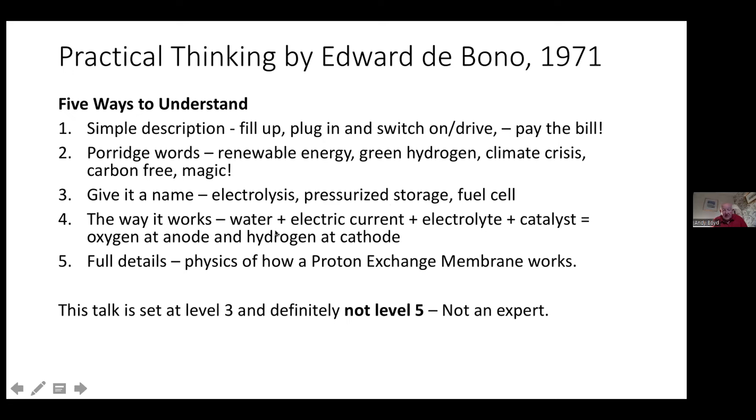Then onto even more complicated is the way it works. And finally, to full details, all the physics of how things work. Well, this talk is set at level 3-ish, and definitely not level 5. So it's not an expert view. So when you see these words, electrolysis and pressurized storage and stuff, don't really ask me the full details of how proton-exchange membranes work, because I don't know.

Just a little bit about sustainability. Sustainable projects make things better today. If they don't make things better today, then why would you do them? And you have to do it efficiently, and you have to bank for the future. So doing something today that makes things better in the future is the banking for the future. And the final one, the fourth, is with fairness, because without fairness in the system, people eventually withdraw their support and projects become unsustainable, or governments become unsustainable.

So just moving on a bit, here we are now. The hydrogen industry is going crazy. There's so much going on. Every day there's a new announcement about something to do with hydrogen. The EU is committed to produce 10 million tons of renewable hydrogen by 2030. And that translates to about 80 billion euros. It's a huge, huge market, potentially.

Scottish Power's committed to producing something called a hydrogen hub in the Cromarty Firth, and there'll be more of these in Scotland. European gas network operators want to create a backbone pipeline network so that they can pump hydrogen all around Europe, as a forerunner to a trading mechanism. SSE have proposed to build a hydrogen production plant at Brora attached to an existing wind farm. And SGN and INEOS, that's Scottish Gas Networks, are going to trial a hydrogen pipeline in Grangemouth.

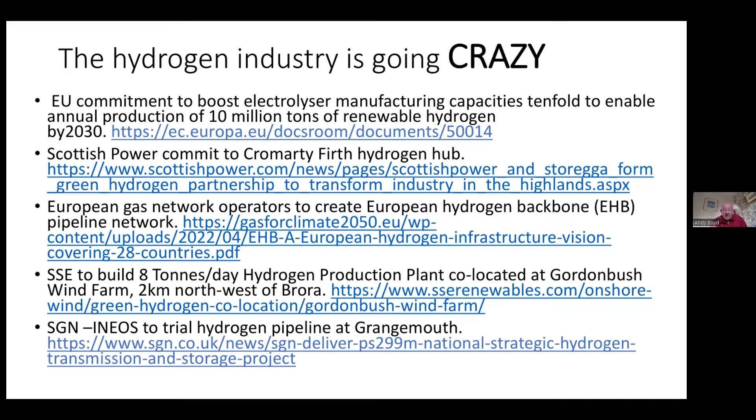So the contents of the presentation are: background, production - how do you make it, use - what would you use it for, how do you store it, how do you move it about, safety is a big issue, and then something about the politics and strategies for a hydrogen future.

So the background: hydrolysis was discovered at the time of the French Revolution, so it's been around for a long time. Hydrolysis coupled to renewable energy gives you green hydrogen. There is blue hydrogen and gray hydrogen. Blue hydrogen is made from hydrocarbons and coupled to carbon capture and storage, and gray hydrogen isn't - it's the other stuff. It's been much talked about as an industry for at least the past 30 years, including in Jane's book on with Malcolm Slesser, where she's got a whole section on potential for hydrogen.

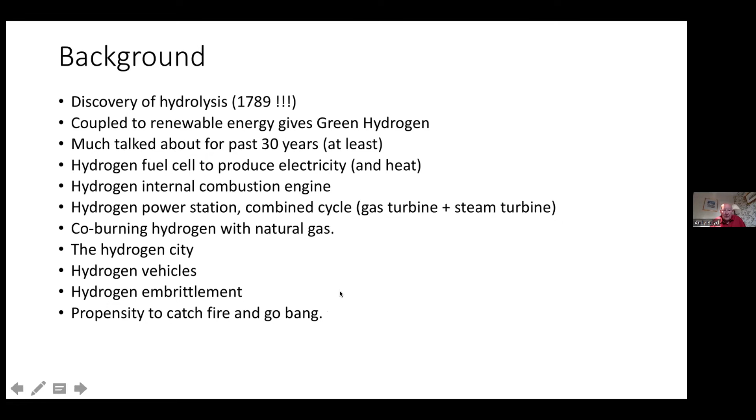And here's why. This is the hydrogen airship that caught fire in 1937. People will cite this as saying why you can't have hydrogen, because you're going to have disasters like this.

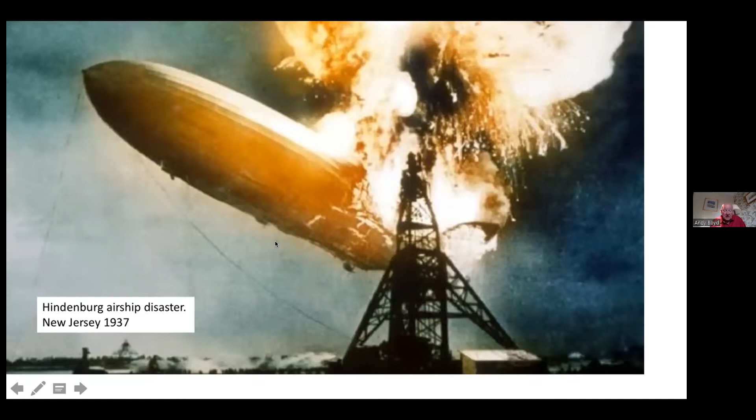More recently, there have been other disasters with hydrogen. At the Fukushima nuclear power station in Japan, there was a hydrogen explosion. Hydrogen was produced in the reactor by a malfunction, which blew the top off the reactor.

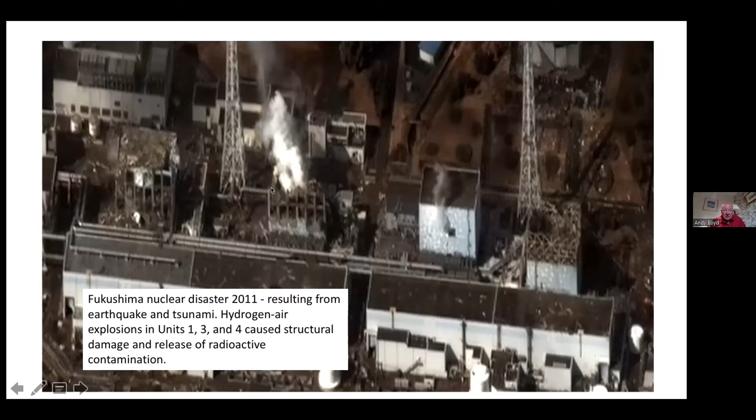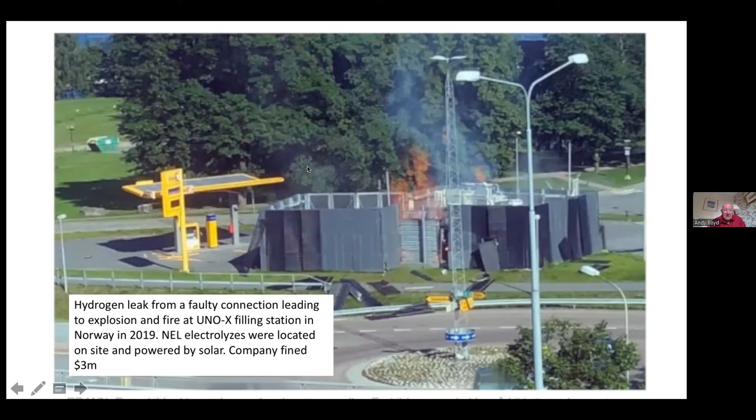So these connections between one bit of the system and another are quite susceptible to leaks, as you would expect if you had one piece of pipe joining another - it's the bit where they join where you're likely to get the problem. So there's been a lot of research and development on different types of joints. That's ongoing, but that's what happens if you don't deal with that.

So here's an interesting but quite a busy slide about the properties of hydrogen. It's the smallest atom, the lightest, it's highly diffusive, and as you saw above, it's highly flammable. At 1 bar and 25 degrees C, so that's ambient temperature, it doesn't weigh anything - it's light as anything, much, much lighter than air. If you have a cubic meter of hydrogen, you've only got a few grams of the stuff in there.

The mass energy content, though, is 120 megajoules per kilogram, which is higher than methane and higher than petrol per kilogram. But of course, if you've just got gas, you don't have very many kilograms, so this is what this volumetric energy content is. It's only got 11 megajoules per cubic meter, where methane has got 40. So because methane is denser and has got less energy content per kilogram, it works out that for the volume at ambient conditions, it's got 4 times the energy than hydrogen has.

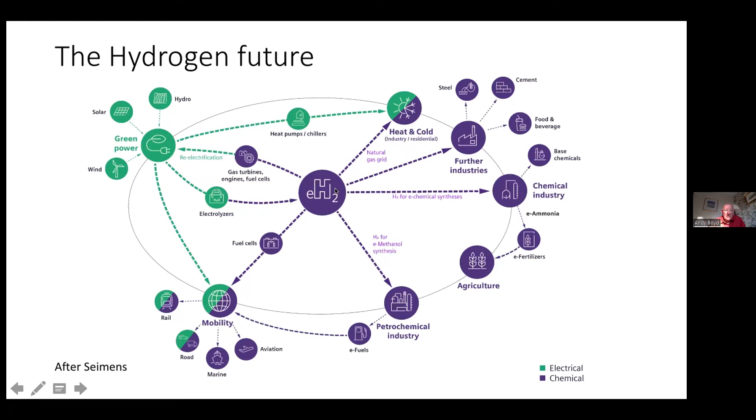So back to that hydrogen future. We've been through this before, and it's just stuck in again. And now we're going to be going on to how you make it through electrolyzers and what you do with it. So production and uses.

Water electrolysis, that is passing electric current through water, produces oxygen at the anode and hydrogen at the cathode, and this is what's called green hydrogen. They also produce it from methane pyrolysis. That's methane bubbled through molten metal, and it breaks down and produces hydrogen.

The most common way of producing it, though, is through steam reforming with methane at high temperature, and that produces grey hydrogen, which can become blue hydrogen if you've got carbon capture and storage. Oh, sorry, let me go back. And there are other methods.

So currently, the world production of hydrogen from all methods is about 90 million tons per year. So an EU proposal to produce 10 million tons a year is a significant part of the world production at present.

It's used mostly in the petrochemical industry for the desulfurization of hydrocarbons. And it's used to make ammonia, which is used to make fertiliser, and it's used for fats and oils, and even in margarine. It's used in the semiconductor industry as rocket propellant and all sorts of other special scientific-like uses. And it's used as an energy carrier in fuel cells and e-fuels.

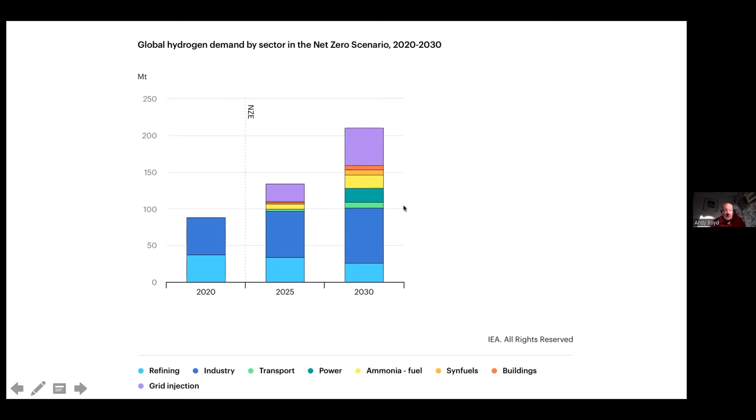So let's just go on to production. How do you make it? Well, there's alkaline electrolysis that's been known about for years, which is, well, you'll see a slide in a minute, but it's an electrolyte and a cathode and an anode. You pass electricity through it, you get oxygen at one and hydrogen at the other.

The proton exchange membrane method has taken over from these other methods. So there's no more... it's like the Sony system for making whatever it was that didn't become VHS—I can't remember what it's called. But following along is this stuff called solid oxide electrolysis, which might become the DVD of hydrogen production. It's got some good credentials. And then there's a whole host of other methods coming along, all in research and development, developing fast, but this proton exchange membrane method seems to have got the jump on everything else.

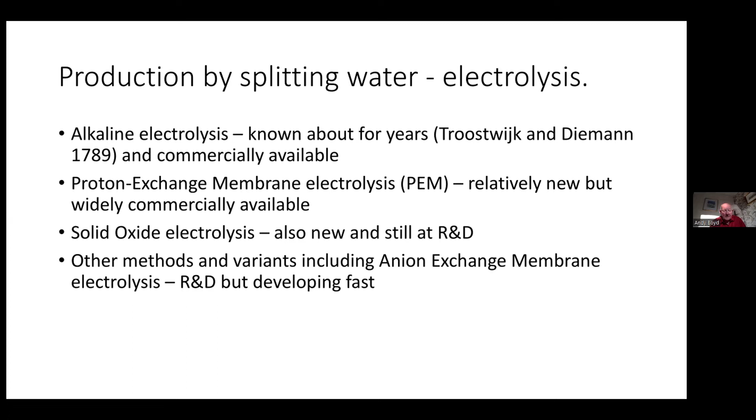So, alkaline electrolysis. This is the liquid method, using usually potassium or sodium hydroxide as your electrolyte. You have a cathode and an anode, and some sort of separator so the bubbles don't mix. You introduce water, and what you get out at this side is hydrogen, and what you get out at this side is oxygen. That's a liquid, low temperature process, and that was the preferred approach for years and years, until they came up with the proton exchange membrane method.

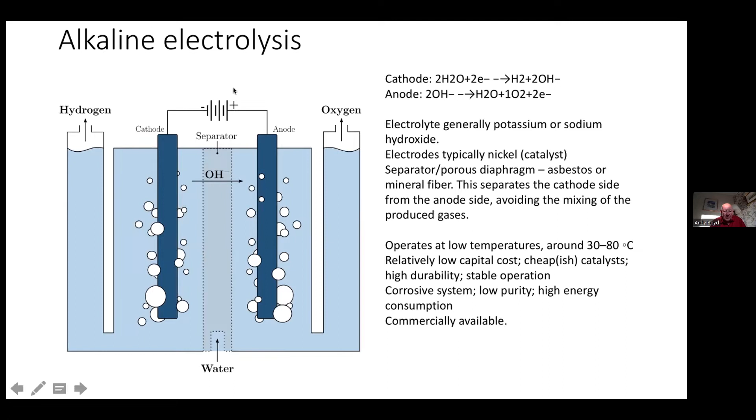This is a plastic sheet. On one side, in fact on both sides, but with different metals, are catalysts which become the anode and cathode. You introduce water at relatively low temperature, and this proton exchange membrane allows hydrogen ions to go through, but it doesn't let electricity through. So you produce hydrogen at one side, then oxygen at the other side. This technology is now becoming widely available.

Siemens, for instance, have just built a very large factory to produce cells that do this in Berlin. And there's a very large manufacturer of these types of membranes in Sheffield.

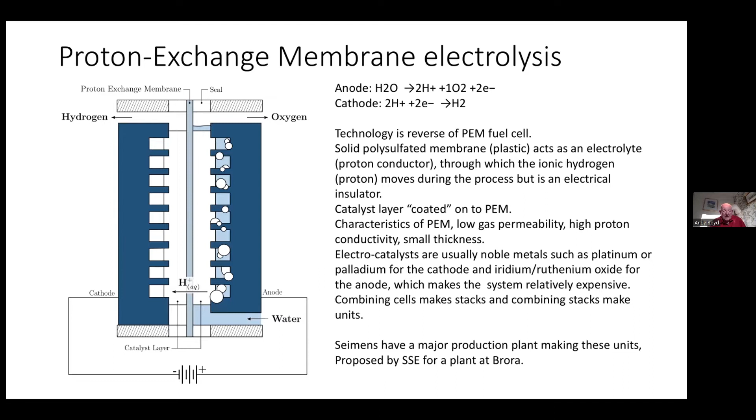The one that might be coming along, the sort of DVD that's going to replace the proton exchange membrane possibly, needs to run at high temperature but has possibly higher efficiencies—this is the solid oxide electrolysis method. The great advantage is that the cathodes and anodes don't have to be platinum or palladium or other noble metals. They can be a more affordable material, and the stuff comes in as steam. It's high temperature, and this is the sort of method for producing hydrogen they've been looking at in the nuclear industry for linking up to nuclear power stations, where you've got the opportunity for high temperature steam as well.

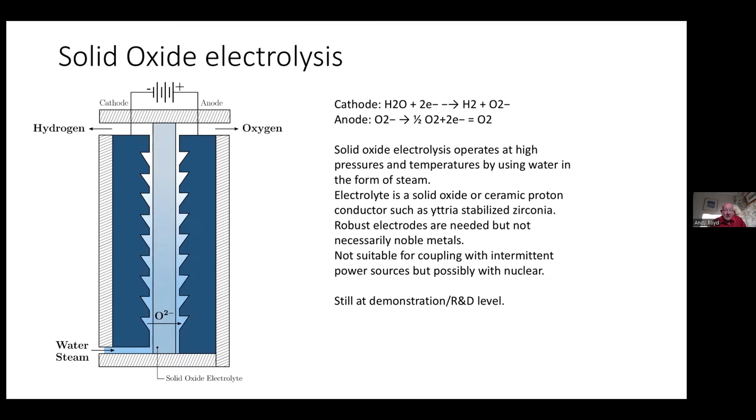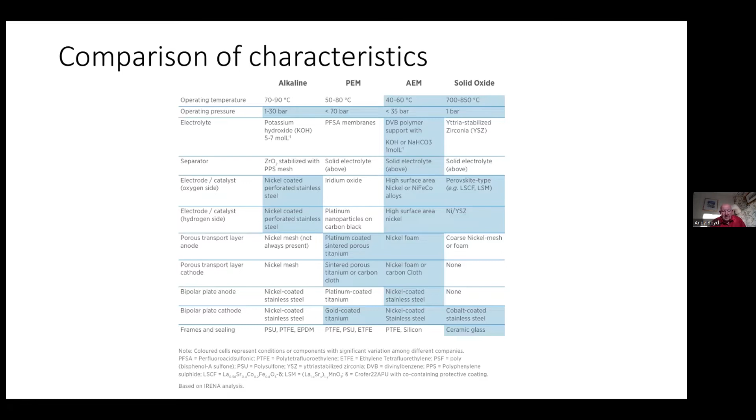This is a busy slide, which you can look at another time if you download the presentation. This looks at some of the differences between the different methodologies. The membrane method is 50 to 80 degrees C. Solid oxide is 700 degrees C. So you finish up with a different type of development altogether.

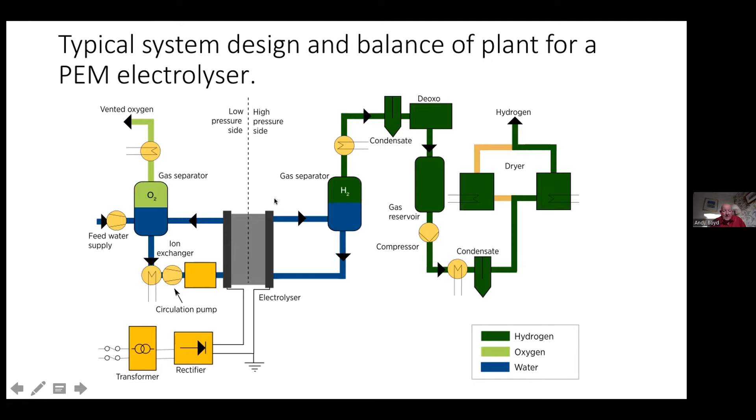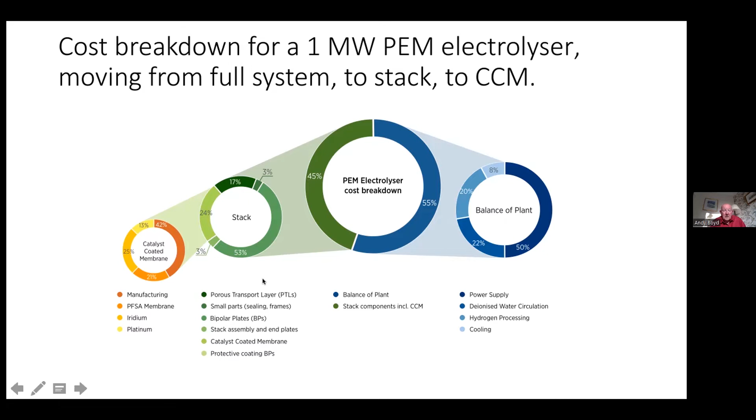Now we come to one of the problems: when you've produced hydrogen, what do you do with it? How do you store it?

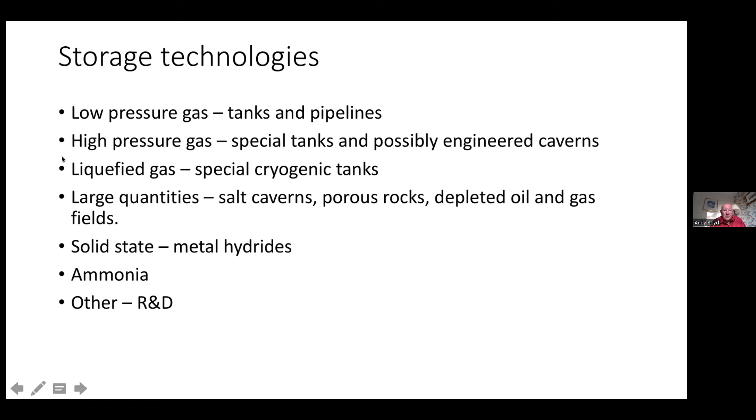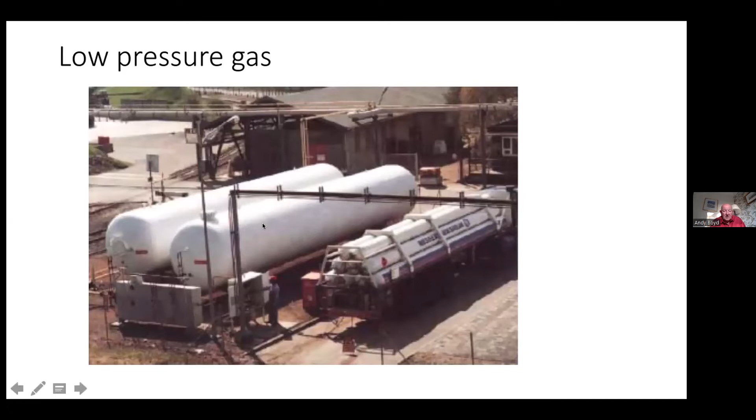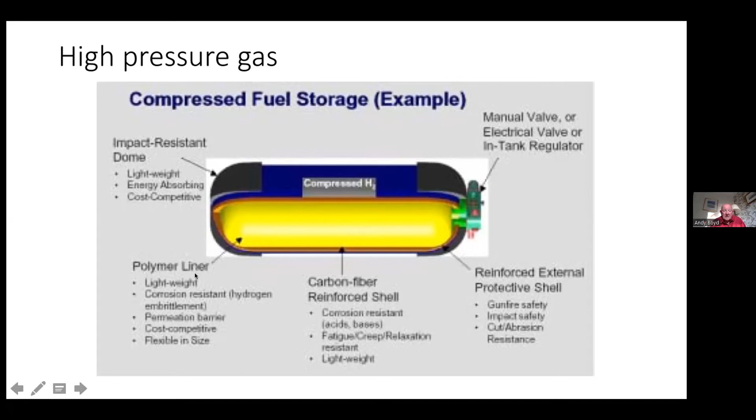So there's quite a lot of work going on about storage technologies. Here's a couple of pictures - some low pressure gas in tanks, fairly conventional. This picture talks about the complexity of compressed fuel storage tanks, the sort you'd have in a bus or car - impact resistant, with special valving, multi-layered, a carbon fiber reinforced shell, and probably a polymer inside.

And that's a pretty specialist piece of kit, as is a liquefied gas tank, because that's insulated and gas can bubble off, and when it bubbles off, it takes in energy and cools. So again, that's a pretty sophisticated piece of equipment.

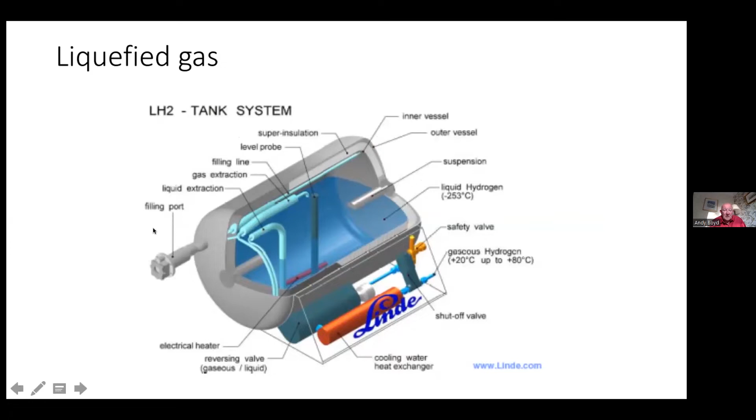As I said, in large quantities you can store it in rock and salt caverns. They've already been doing this for years and years at ICI, at Teesside, in some salt caverns. And in France, they've been storing hydrogen in porous rock.

There's talk of using depleted oil and gas fields. And then there's this issue of cushion gas - if you put hydrogen in there, when you take the gas out, you have to leave some there as a cushion. I'm not sure I fully understand that, but it becomes quite a problem at large quantities in these sorts of places.

And as I said, there's solid state storage as metal hydrides in a porous medium. There's also some R&D into various types of carbon-based materials that can hold hydrogen. I'm not sure I understand all this - it's a bit too much chemistry for me - but it's certainly an area for specialist storage of hydrogen.

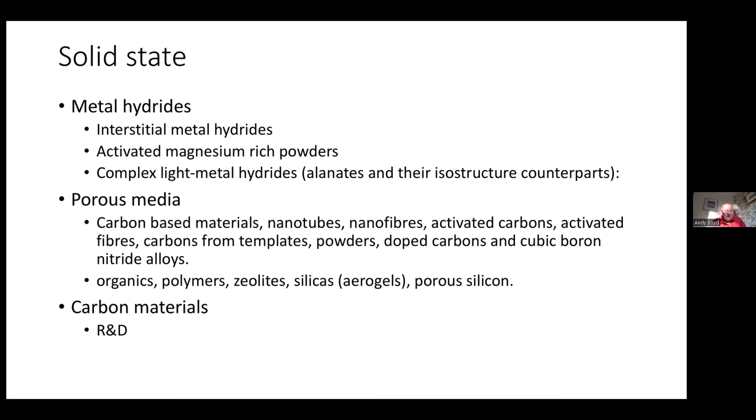So what do you do if you use it? Well, how would you use it? It can be used for heat and power, for civic buildings, schools, hospitals, farms, commercial kitchens, using fuel cell technology or direct combustion.

Now, a fuel cell is the reverse of the PEM, the proton membrane. You introduce oxygen, that's air, at one side, and hydrogen at the other side. The hydrogen goes through the membrane, creates water, and in doing so drives an electric current between the electrodes. So that's how a fuel cell works - it produces electricity, but also heat.

So you can have a fuel cell in a container next to your hotel that will provide the electricity and heat for the hotel, or a couple of containers with this stuff in it. As I said at the start, future use is in heavy vehicles, buses, ships, cars, and possibly airplanes - using fuel cells and internal combustion engines. So you might have ships running on internal combustion engines that are burning hydrogen.

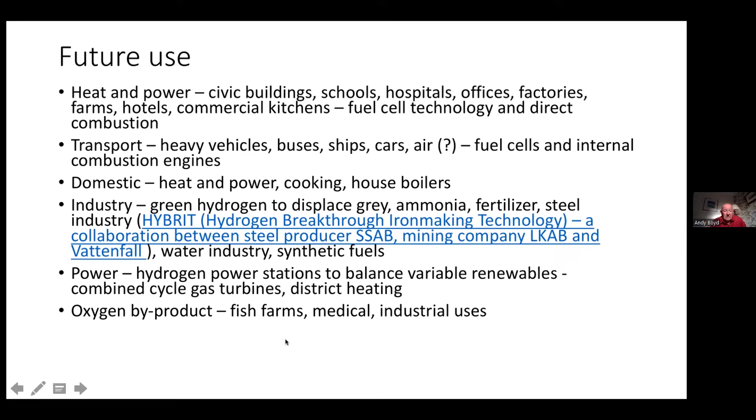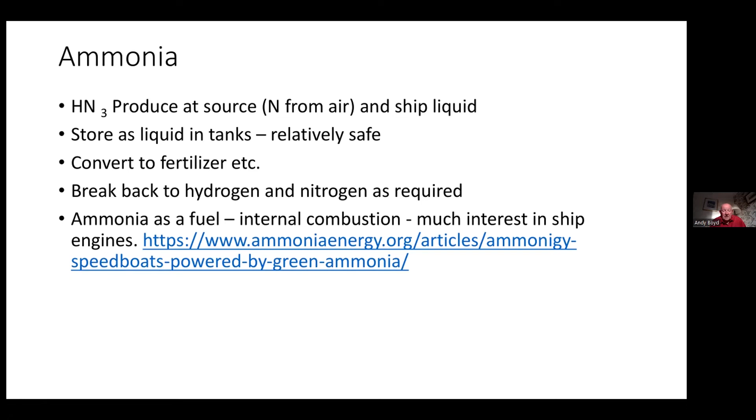Now, the problem with ammonia in an internal combustion engine is that it's much slower and needs a higher temperature to burn than petrol. So it doesn't really work very efficiently unless it's in slow-moving internal combustion engines, like ships' engines.

Okay, I'm just going to move on to some other terminology that's emerging: these terms of pods, hubs, and valleys. I think I've probably invented the term pod - this is where green hydrogen is produced, and it may be used locally, or exported or collected and then moved on to somewhere else. A pod at present would be the proposed development at Brora, and the quite extensive developments on Orkney, and it doesn't count small dedicated production units which might come up.

But I could imagine there being 100 plus, maybe 200 pods around the UK where there is abundant green energy. Now, hubs are centres for hydrogen collection, storage, and onward transmission, and they may include a pod or two, and some local usage. But you might get new industry using hydrogen, such as making ammonia. I could see there might be half a dozen of these in the UK, perhaps half a dozen in Scotland, and perhaps 20 in the UK.

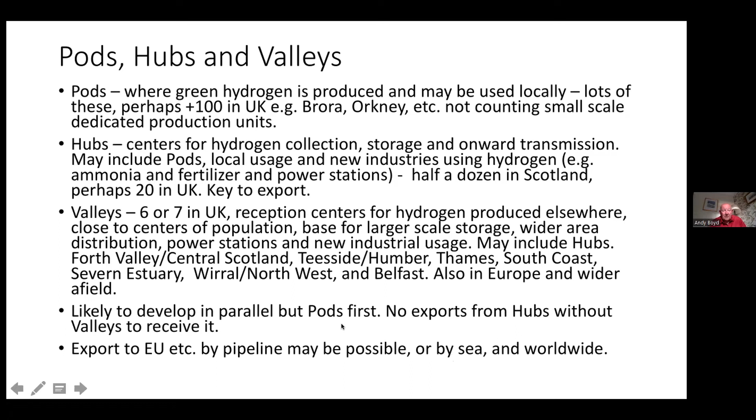Oh, sorry, I did it again.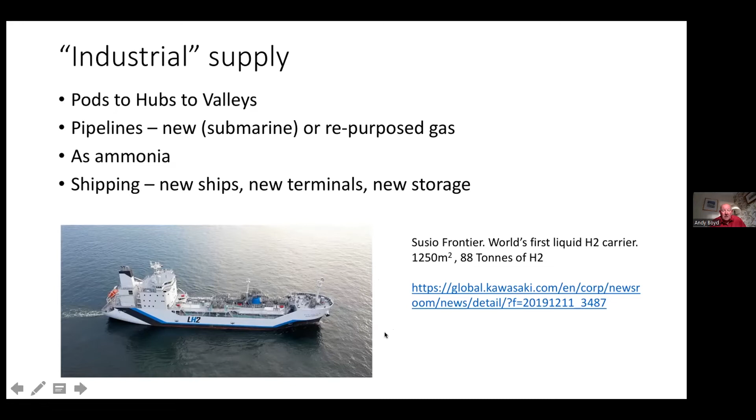You could ship it as ammonia, or you could ship it using new ships to new terminals and new storage facilities. And this is a picture of the world's first liquid hydrogen carrier. It's got a tank of 1,250 cubic meters, which is not that big, and it only carries 88 tons of hydrogen. And it caught fire a few weeks ago. The fire came from one of these connections between one bit of pipe and another bit of pipe. So this whole question of connections and valves is an ongoing challenge for safety.

Domestic supply, and I say domestic because it's the sort of thing where natural gas would go now. There's a lot of talk and a lot of proposals from the gas companies with vested interest that they should blend it with natural gas and deliver via the existing gas network with a large amount of storage in the pipes themselves. But the feasibility is not yet fully proven. But old town gas supply had a high hydrogen content. So there's some feasibility in there, but how it works

is being developed. You could build dedicated pipelines, and there are some dedicated hydrogen pipelines over long distances in the United States. But the best technology is still a subject for R&D, and they'll be costly onshore and cheaper offshore. And then, of course, if you're onshore, you've got all the planning and safety issues. If I'd like to run a new hydrogen pipeline through the center of Stirling, you'll have everybody saying it's not safe because of the photograph of the Hindenburg disaster. So there's a lot of issues about new pipelines.

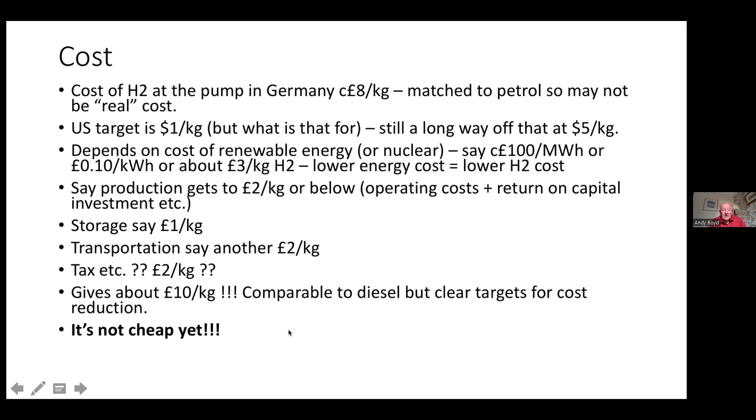And then I'm guessing again at another number for storage, because you've got these tanks to pay for and to hold, and then you've got to shift the stuff around. And before you know where you are, you're going to have some tax. So it's £10 a kilogram. Maybe it isn't as much as that. Maybe you can get it down to £5 a kilogram, but it's not cheap yet. This isn't free power. Quite a long way short of it at present.

So what does a green hydrogen future look like then? Well, here are the drivers, the politics, the policy, strategy and plans. The obvious drivers are climate change and decarbonisation. There's also energy security, as we all know about with Ukraine, etc. People are trying to reduce the cost of energy, developing new green technologies to take over from the old-fashioned technologies to create green jobs with the potential for export.

And of course, the export gives a potential new public revenue stream, which the government's really interested in if they can find something else to tax. And then when you look at something that might be an £80 billion industry within 10 years, there's a lot of investment profits that people are interested in. So there's quite a lot of powerful drivers there. And you say, well, how will the market develop? Well, I don't know. I've got a couple of slides that come onto that, but there isn't a market at present.

And for a project to be considered bankable, the green hydrogen projects will require an association with an offtake contract, and that's with a credit-worthy offtaker. So you can't sell it to somebody unless somebody's going to buy it, and you can't invest in the project unless you've got somebody to buy your product. So there's a quandary that people are going through there as to how to get these very good ideas off. If you had to raise 10 or 20 million pounds to do something, how would you do it?

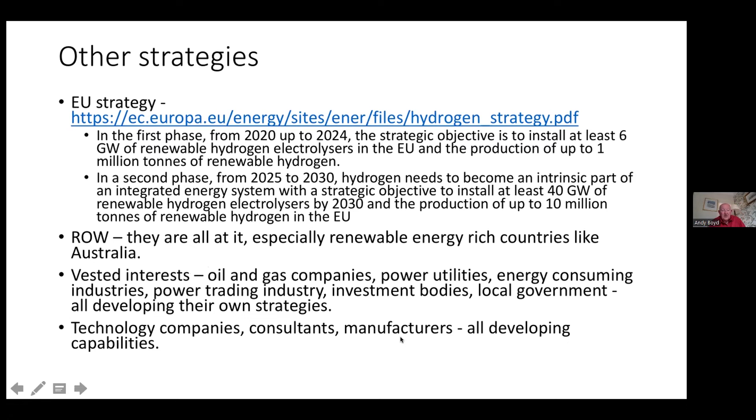And there is quite a lot of stuff going out there about what people want to do and what they suggest should be done by way of creating a market, etc. And lots of technology companies and consultants and manufacturers, which are all developing their capabilities. And this is growing at an enormous rate. So what might happen in the future? Well, I've got 3 paradigms here, which look a bit similar, but there are subtle differences. In paradigm 1, the big players and the UK government move towards setting up an H2 trading market arrangement, similar to the electricity market.

And in that, there are producers. There's a hydrogen grid, similar to the national grid for electricity. There are wholesalers, people who buy from these producers. There are retailers who also buy from the producers. And therefore, there are people who make a living just trading. And their suggestion is that they'll trade hydrogen through these things called hydrogen purchase agreements and carbon offsets. So there could be a whole sort of financial industry developed similar to the electricity industry, all adding cost, of course, via these hydrogen purchase agreements or other sorts of wholesaler type agreements.

There would also be a safety regulator, likely the Health and Safety Executive. There'd be an H2 market regulator. If you had one of these, you'd have to have some sort of market regulation. Is that going to be Ofgem, or is it going to be H-gem or something? I don't know, but that doesn't exist yet either. Of course, the Treasury would love to get its hands on this because it's a tax revenue. And there might be some rebates depending on the arrangements. And these pods, hubs and valleys come into their own, with valleys becoming very significant. In this methodology, you can't have buyers unless you get valleys.

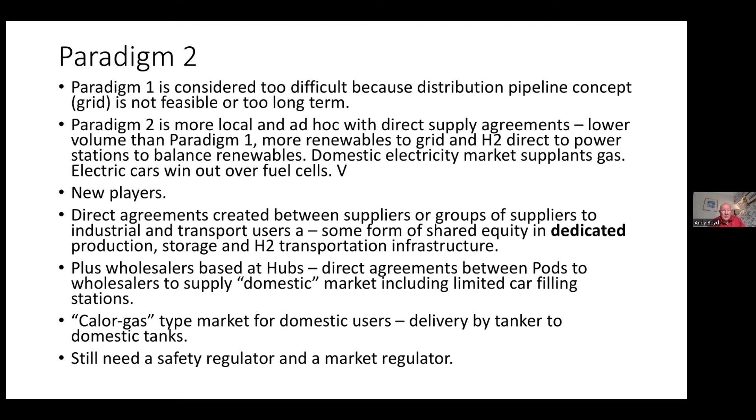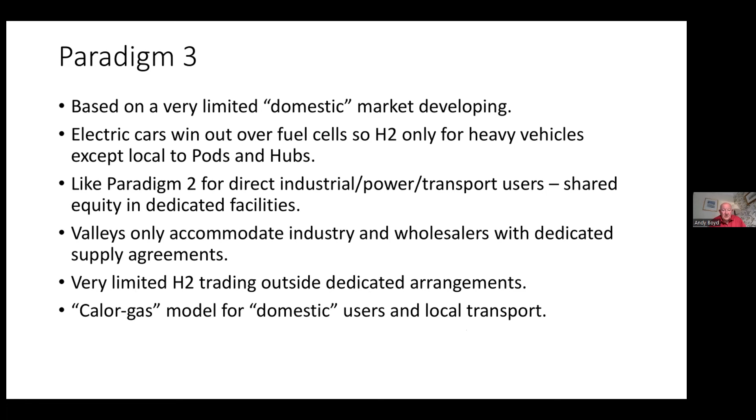But there'll still be deals done for direct industrial power and transport users, with equity in the dedicated facilities. The valleys therefore only accommodate industry and wholesalers with these direct supply agreements. There'll be very limited H2 trading outside of the dedicated arrangements, but the Calor-gas model for domestic users and for local transport might still apply. So you might start with something that looks like this, move on to something like number 2, and eventually finish up at number 1. But it's all too complicated.

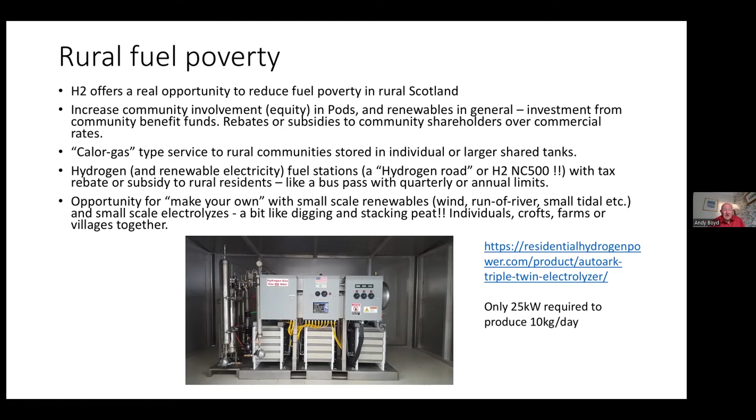All right, so I'm coming towards the end now, which is this stuff is happening very quickly. There's so much going on in the industry now, it's very difficult to keep up, and it's just going to keep getting faster and faster.

There are very strong industry pressures because there's lots of money to be made out of this. I think the politicians are slow to keep up because there's actually quite a lot of science in this, and it's not certain what's going to happen. There are lots of technology developments, but some market leaders or some technology leaders are emerging.

So if we come back here in 3 or 4 years' time, the politicians might have caught up and the technology might have settled down a bit. Safety regulation is coming along, but it's a big difficulty, especially if you need new legislation, and the whole question of safety standards is very, very difficult for people to develop.

And you've only got to get one fire or one explosion, and the whole safety regulation goes into question. I think there's a great danger of getting things wrong in this turmoil. I think that politicians and technologists can take the wrong direction, and I think there'll be some people falling on their face as a result of this.

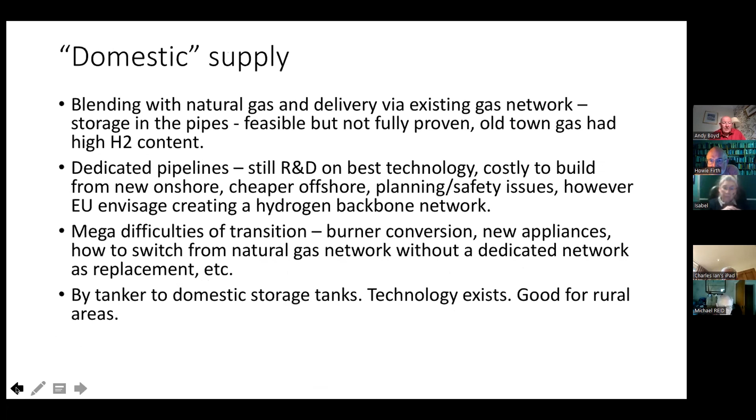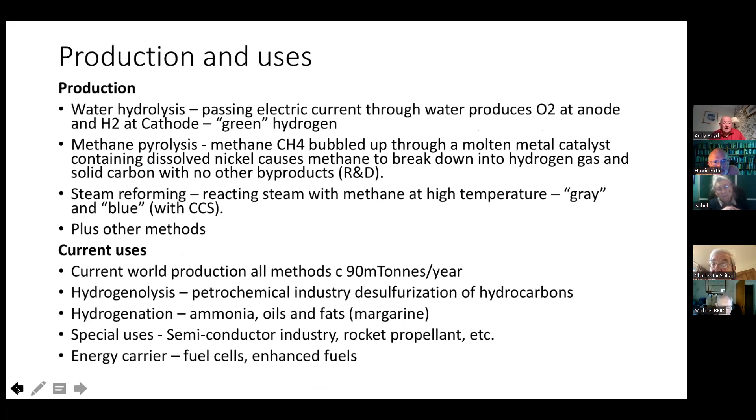And oh then... no, I was going to go back to that thing I started with, which is the next one down, which was that one. Okay, which was properties of hydrogen, because a lot of potential questions will, I think, probably require me to look at those numbers, because I can't remember them all. There's too many zeros and things in it.

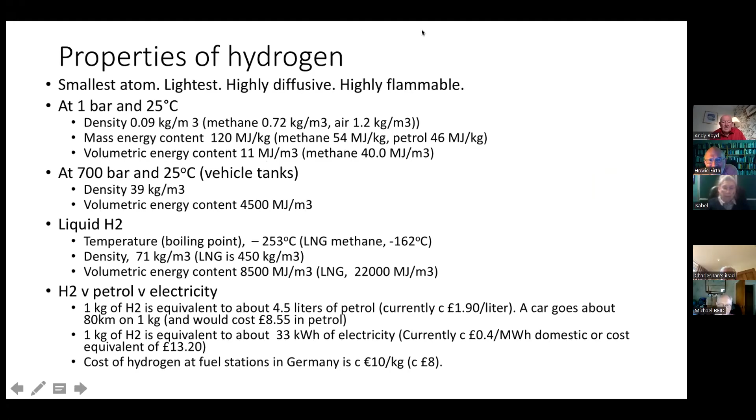The one advantage if you unshare your screen is I think everybody will see each other. But it's okay. If I just do that, and then you could go back to it. Yeah, stop there. That's it, and you could go back to it there, and that way I can see the faces and the expressions and the signs of a question. I've got one myself, but I think. Could I ask a couple of questions? David, yes, indeed.

Around, well, the UK says it's going to try and produce 0.8 million, and the EU says it's going to produce 10 million tons. How does that compare with the current level of green hydrogen production in the EU or the UK? And does either of those numbers have a sort of like a target price attached to it?

The first one is, I don't know exactly how much green hydrogen is produced in the UK or Europe, but it's relatively small. It's in the tens of tons rather than the hundreds of tons or thousands of tons. In the EU, it's much more because they've been doing it for longer, and they use a lot more hydrogen in fuel for cars, but it's nowhere near 10 million tons. It's some very small proportion of that at present. But if we come back next week, it'll have probably trebled.